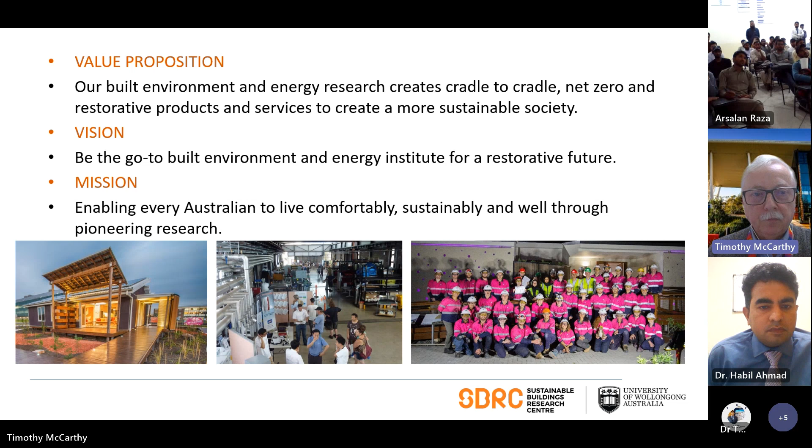This is our solar decathlon team, a very vibrant bunch of students who are here photographed in Wollongong with one of the lighthouses behind them.

And this was taken before we embarked on our trip to Dubai. They're a big team. I'll tell you a little bit about Solar Decathlon itself. This was set up by the US Department of Energy, and it had its first outing in 2002. So it's been going for quite some time.

What it does is it challenges students to design and build and operate a net zero energy building. And the important part of this is that the students actually have to both design and build, and we have to then transport the house from our location in Australia to the competition site. So one house went to China and the other went to Dubai.

The requirements of the contest are that the house must be a net zero energy home. So it must generate more electricity than it uses, and it has to provide a great example of sustainability. And obviously, the last bit is that we must highlight the benefits of off-site and modular construction, because this house was built in Australia and the Desert Rose house was then transported by ship in 8 shipping containers to Dubai, and it was rebuilt in Dubai for the contest in only 2 weeks by our students.

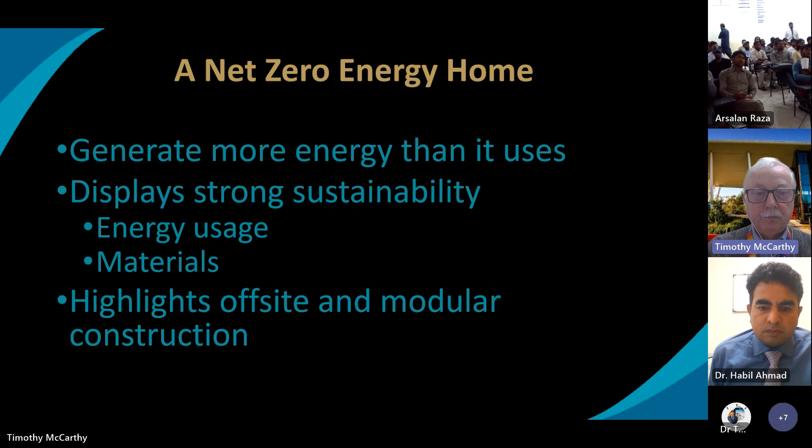The Solar Decathlon contest has been all over the world, and I've had the pleasure to compete against teams from Pakistan when we were in China, and there have been contests also in India, Africa, Europe, North America and South America. The only continent that hasn't had a Solar Decathlon contest of its own is Australia, and we're hoping to change that maybe by about 2027 or 2028.

The first house that we entered into Solar Decathlon was the Illawarra Flame House. The Illawarra Flame is a tree that grows in our neighborhood in Australia. And what we liked about the tree analogy is that this tree spends a lot of the time without its leaves, without its flowers, and it looks quite ugly. And then when springtime comes, it becomes beautiful again. So the idea of the Illawarra Flame House was to take an old, ugly house and make it beautiful again.

And the old house, I don't know, maybe Habil has seen some of these houses when he was in Wollongong. We turned it into this house, the Illawarra Flame, and that's a picture of it at our campus in Australia. And as Habil mentioned, we actually won that contest in China. And here's a picture of our construction leader, Scott Redwood, kissing the trophy, and that was back in 2013.

And one of the benefits of doing contests like this is that it trains people not just in the theory, but also in the practice, and then in the practicality of actually building a house and transporting it. Scott, who's shown in the picture there kissing the trophy, actually runs his own business in Wollongong at the moment, building sustainable houses, and has a very successful consulting engineering business as well. He actually employs quite a few of our students and is sponsoring one of my PhD students. So it's great to see the engineers who came through the Solar Decathlon giving back 10 years later.

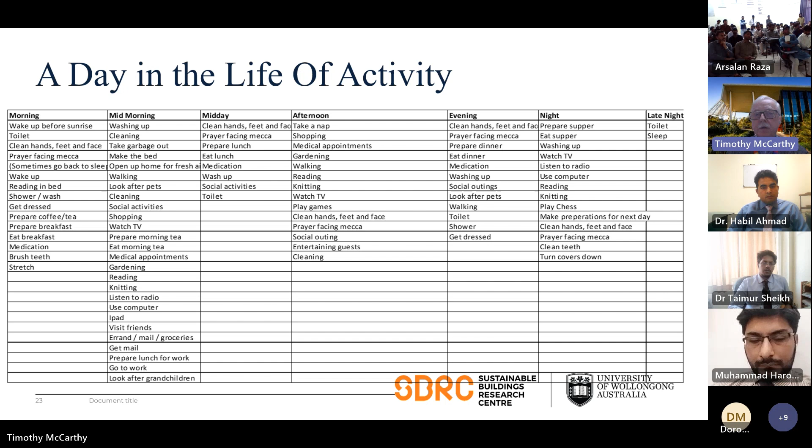You probably can't read this, but one of the activities that we did was with people living with dementia, we went through everything they do every day of the week, from getting up in the morning to going to bed at night, and making sure that our house allows them to do those activities, even if they have poor vision, poor mobility, and they forget things.

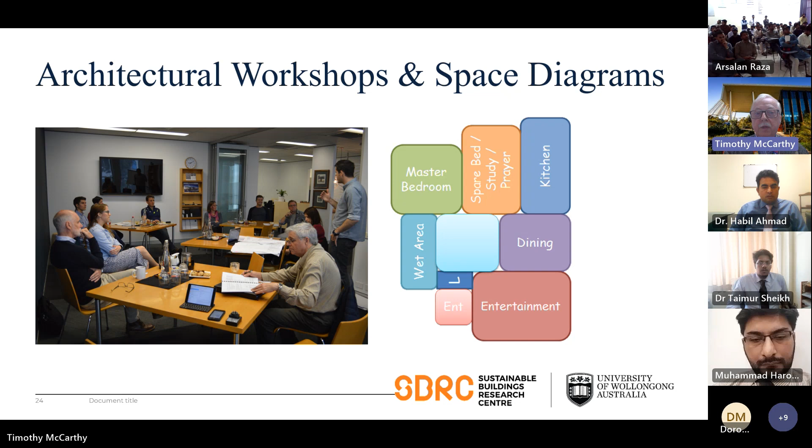In designing a house, we think of it in spaces. So we have places for eating, cooking, sleeping, relaxing, entertaining, meeting people, and cleaning ourselves. So we can divide a house up into all of these activity spaces. But some of the important things that we then have to incorporate within the design, now this was our floor plan that our students came up with.

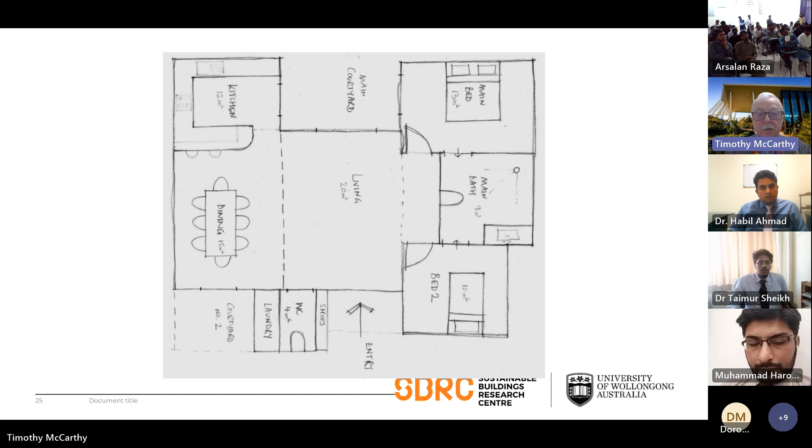They looked at having 2 bedrooms, a dining room, a bathroom, and this floor plan changed dramatically when we started to apply principles of dementia-friendly architecture. So this is the final design that we ended up with. And the blue arrows that you see, I'm hoping that I'm not talking too fast for the slides, but these blue arrows indicate lines of sight. And this is what supports somebody who forgets where they are.

So if somebody is in bed in the top left-hand corner, let me just see if I can, so if somebody's in bed around here, they can see into the bathroom and they will see the toilet bowl, they will see the shower, and when they wake up, they'll know that that's where they can go to the toilet. And research has shown that people who are living with the advanced stages of dementia are 8 times more likely to use the bathroom and keep themselves clean if they can see it and they can recognize it.

If they can't see it, then it's quite likely they will not recognize where it is and they will search for it, and that can lead to problems. Either they get lost in their own house or they think another room is the bathroom. The other thing that we see on this is the other lines of sight is that from the dining room table, you can see the bathroom, you can see the kitchen, and so you will use the facilities.

People with dementia, they're still able to function, provided they can see what they need to do. So if they see the kitchen, they're more likely to go and make themselves some food. So line of sight was a really important aspect of this.

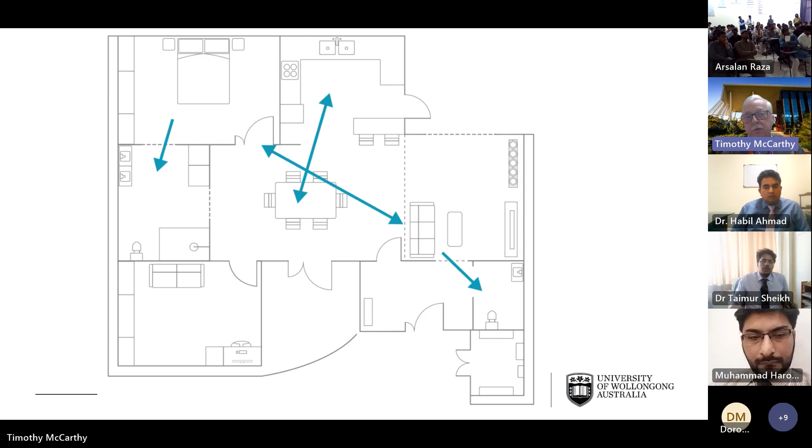Now, a second aspect of the floor plan that was counter to this is the need for privacy. And we were building this house for a Middle Eastern client. So in Dubai, most people are Islamic, and we need areas of family privacy, and we need to be able to separate the guest areas from the private areas.

And so we've achieved that within the house, that when you enter the house through the front door, the family can go through this door and the guests can go through this door. And the guests have their own private bathroom and they have access to the outside area at the back of the house as well. So the family and the guests can be separated.

And now that's, you might think that's normal, but in Australia that's not normal. In Australia, houses are open plan and there are no private areas in many houses, and that's a problem for our potential client.

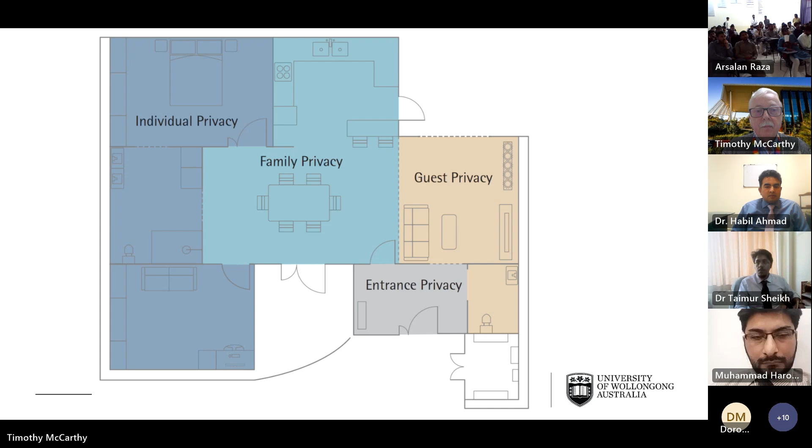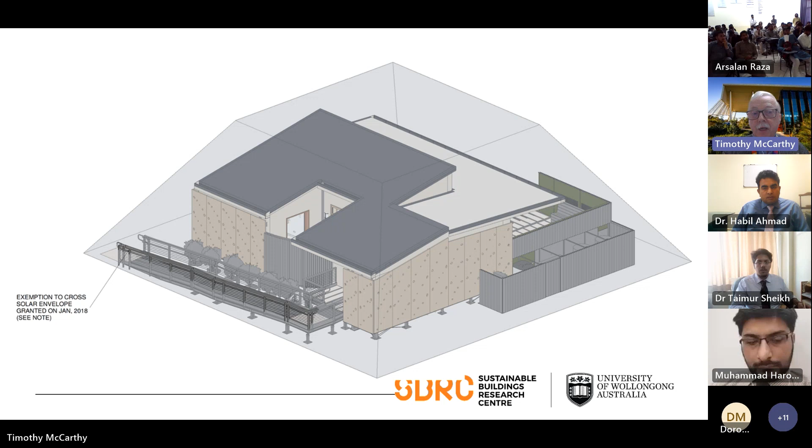Around the side of the house, you'll see there's a light colored wall, and I'll talk a little bit about that later. That's a shading wall that was made out of lightweight concrete that was designed and manufactured by some of our students.

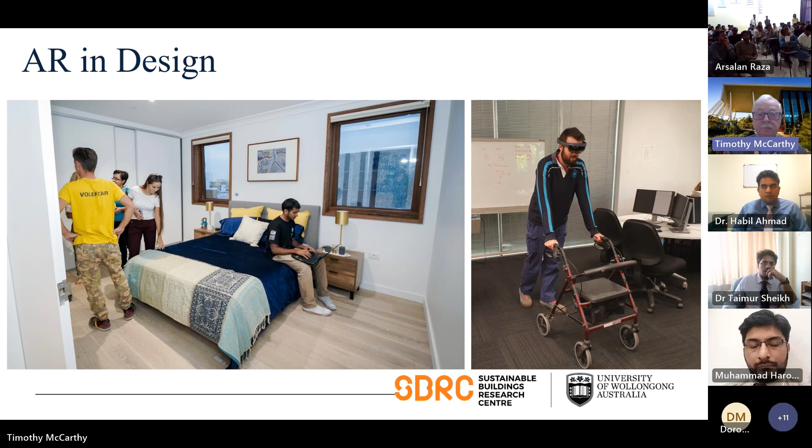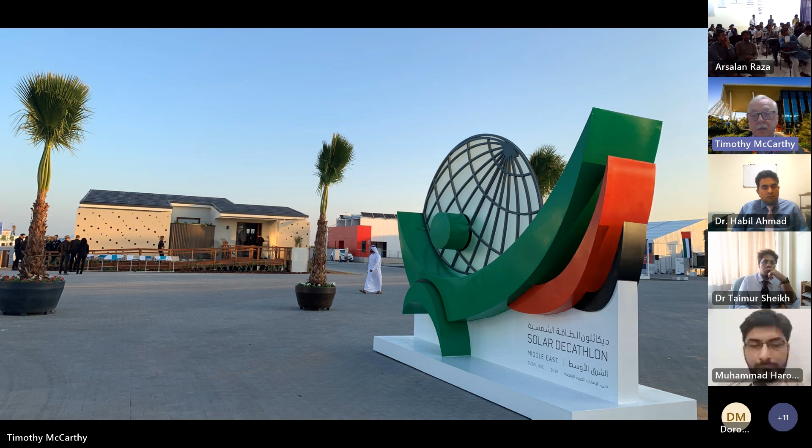Here's a picture of our house in Dubai. So in November 2018, we unpacked the house from its containers, and in two weeks, we built it, a fully functioning house, and we entered in the contest against all the other teams from around the world.

I'm going to talk a little bit now about the design, because I know there are some structural engineers in the audience. It's unusual for a house to have a floor load of 5 kilopascals. And the reason it's such a high floor load is that this was designated as a museum in Dubai because it had so many people coming to visit it. So it was designed way above residential loads.

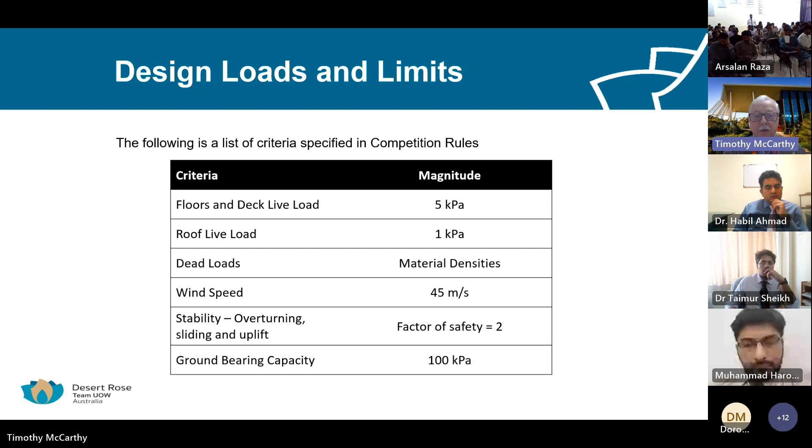It was also designed for quite high wind loads, even though in Dubai it was only in location for a month in total. So those are the loads. So if you have a look under the house, if you ever come to Wollongong, you'll find that it's probably got twice as many piers and foundations as you would have on a standard house. The house was built using cold formed structural steel and some hot rolled structural steel, but mostly it was cold formed light gauge structural steel.

Because we were transporting the house across the world to Dubai and we brought it back from Dubai, we wanted to be able to do that without too much weight. We also wanted to be able to build a house quickly and take it down again, because to move it back to Australia, we had only 1 week to dismantle the house.

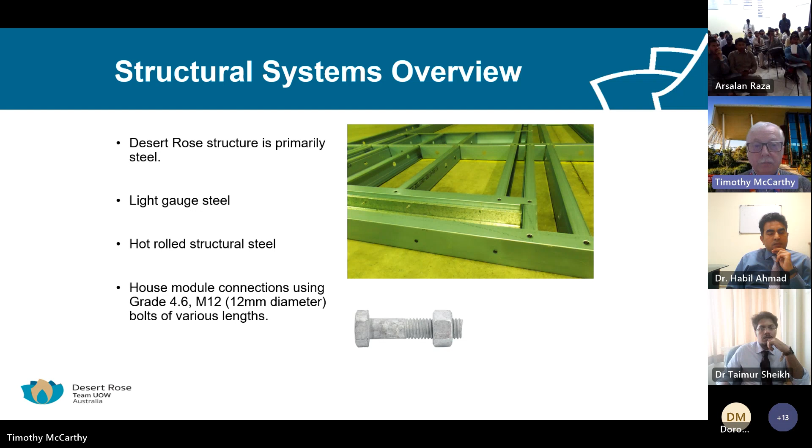The wall frames were designed by our students, but they came from a company called Enduroframe. And all the pieces came with a barcode on them and a piece number. And the students who didn't have any building experience were able to assemble these walls a bit like a construction kit, with all the parts labeled and the drawings telling you where to put them.

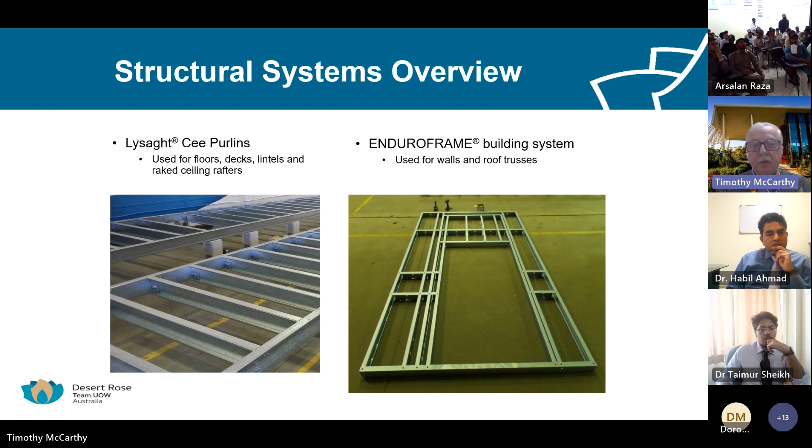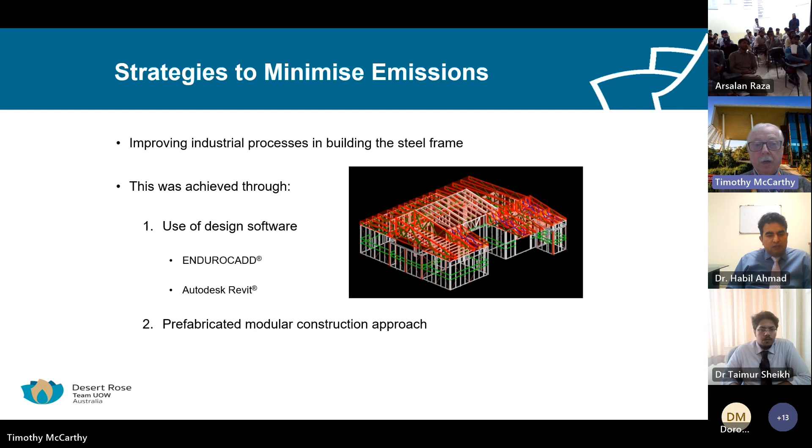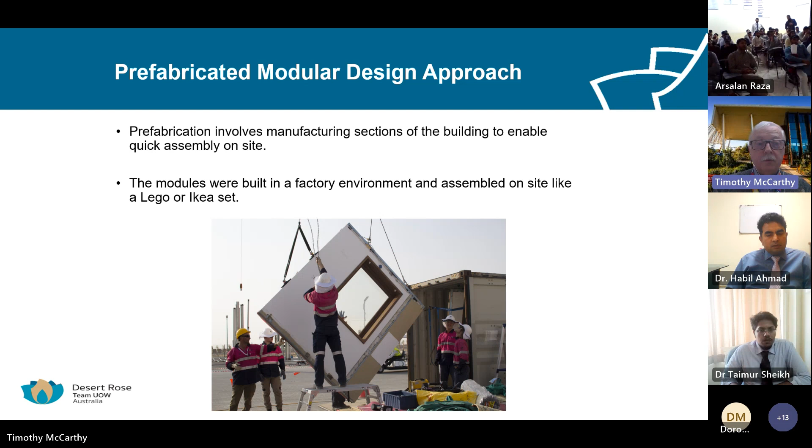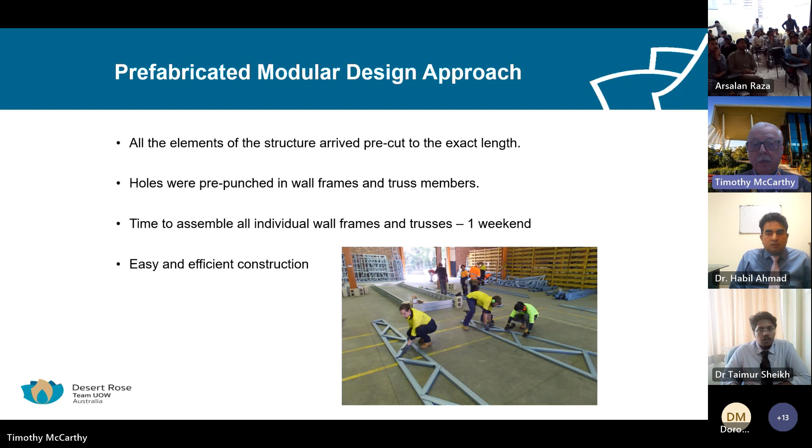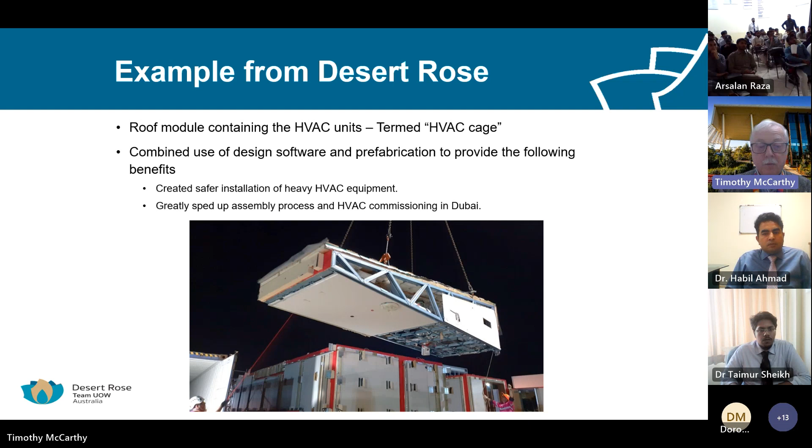The roof was comprised of mainly a modular scheme, and we built the air conditioning system into the roof on the ground and then lifted that up in one piece. And here we see the roof module over the bathroom that already contains all our heating and cooling systems in place. And that was a night shot from construction in Dubai.